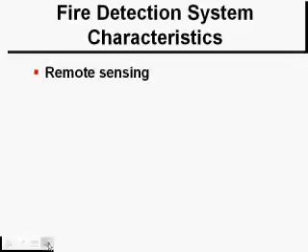But in a transport category jet, big turboprop, and a lot of other, say small turbojets, small business jets, small turboprops, you may be too busy doing other things, or things that could catch on fire could be too far away for you to notice rather easily. So you need a system that'll tell you what's going on far away from where you're at.

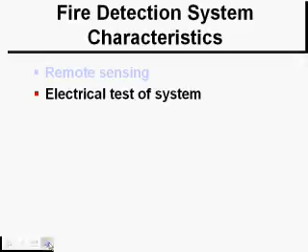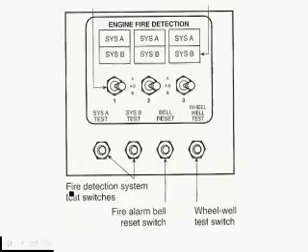These systems almost always have some type of a test. You push a button during pre-flight or during taxi to make sure that the system is operating before you take off. And here's a test panel. I think it's off an A320, and you can actually push these buttons to see if the test will work. And you're going to get lights and or buzzers to let you know that.

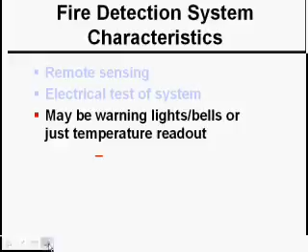And it might not be a very intricate or sophisticated system. It just might be a temperature gauge, like on a NiCad battery would tell you that the battery's overtemping. Might be warning lights. It might have bells as well. These are general characteristics of fire detection systems. We're just going to be talking about airframe fire protection systems in this class. We're not going to be talking about engine fire detection systems much, if at all.

And where can you find these detectors? You can find them on the outside of bleed air ducts. Obviously, inside of the bleed air ducts are going to be hot because the air is coming off of a jet engine. But if it leaks out, that's when it's going to be an issue. So on aircraft with a pneumatic system, on turbine engines, you're likely to have some type of fire or overheat warning system for the pilots to tell them that there's a duct leak and things outside the duct might be getting hurt.

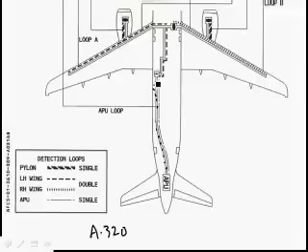So if there was a leak anywhere in this duct right here, it would make this loop come on, and in the cockpit all you would know is that somewhere between the APU and this valve right here there's a duct leak. So you're probably going to shut down this valve so that no more bleed air could come in here, because usually the APU is off in flight, so the bleed air would be coming from the engines. You'd shut this duct off so you wouldn't have any overtemps next to the duct right there.

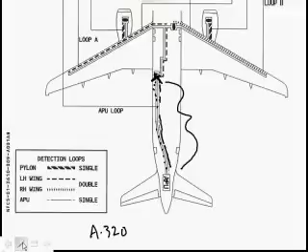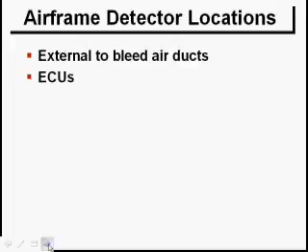Environmental control units are air conditioning packs. The air cycle machine can get hot, especially if there's a leak inside of it. So there's typically an overtemp warning system on environmental control units, on air conditioning packs, air cycle machines. Landing gear wheel wells. It's not uncommon to have overheat detectors. In fact, the A320 has an overheat detector on the brakes themselves. Oh wait, there we are, brakes.

In the cabin, although usually in the cabin it's not temperature, it's usually smoke. Lavatory is a good place to have smoke detectors. I think the FAA requires it under FAR 121, and of course it's a felony to disconnect it. Shame on you for disconnecting the smoke detector inside of the lavatory.

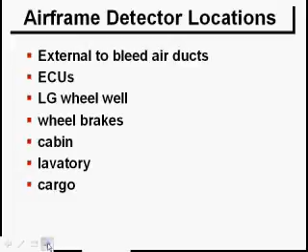Cargo compartments are a place where nobody's there, so nobody could let you know, so that'd be a good idea to have maybe some smoke detectors in there. And the avionics bay definitely might get hot if something is shorting or not working very well. So here are the airframe locations for looking for overheat or overtemperature or flame.

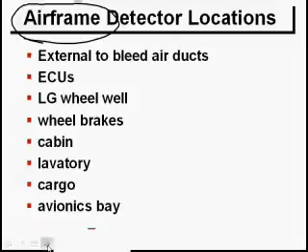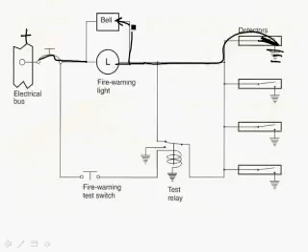Basic types of heat detectors. See if I can get it. You don't have to write this down, but here's a system with separate heat detectors. Either one of these, if it gets hot, it's going to close this circuit and go to ground, and the other side of the light goes to the bus bar, which is positive, although this might be alternating current, and of course to the bell. So the light and the bell could be grounded, and the other side positive, so they would go off. And of course this is the fire warning test switch that you would use before takeoff.

And here's a kind where the stuff inside of this loop, this is actually a really, really long tube, say about 3/32 of an inch in diameter.

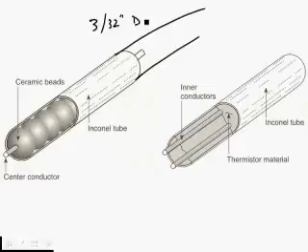And the outside metal is a conductor, and the inside is a conductor. And the material on the inside, if it gets hot, it allows current flow from one conductor to the other, and that would turn on something in the cockpit.

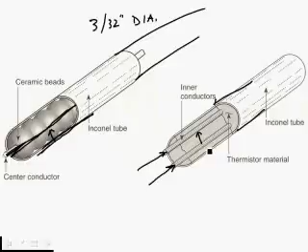Here, it's another tube, same size, probably a little under 1/8 of an inch in diameter, and it just has two conductors in it, and the goop inside, if it gets too hot, it'll allow current flow from one to the other. So this essentially acts like a switch. And there's just a circuit there.

And here's what it would look like inside of an engine compartment or inside maybe a cargo bay. It's just strapped down every 6 or 10 inches, and you can see it's not very big in diameter.

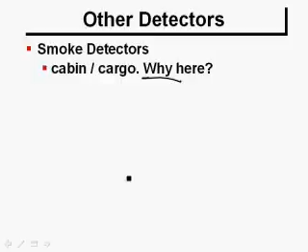Smoke detectors. Instead of just measuring heat, you could measure smoke. In cabins and in some cargo compartments, why smoke detectors there is because you'll probably get smoke before you get flame. You probably get smoke before you get a big buildup of heat. So a smoke detector would be a better first indicator in these areas.

Flame detectors, typically you find those in engine compartments. Flame detectors actually measure for infrared light. And more infrared light inside of a closed compartment would mean you'd have a flame, because the closed compartments aren't open to the sun.

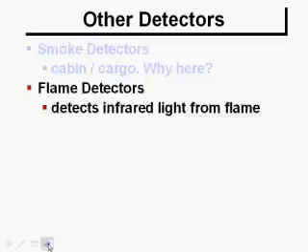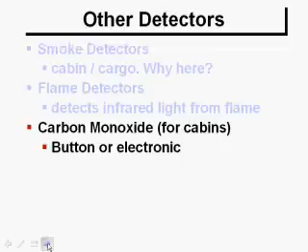Of course, carbon monoxide detectors, you're used to that if you're flying little airplanes and somebody's got an electronic or a dashboard sticky that's got a carbon monoxide detector. One could argue that that's not really a flame detector, but I certainly like having carbon monoxide detectors. And of course, like I said before, it might just be a temperature gauge, and that you'll have to monitor because the light or horn won't come on.

Typically, and this doesn't have to be engine. Let's get rid of that.

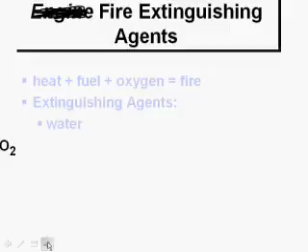Fire extinguishing agents. You've got to have heat and fuel and oxygen in order to produce a fire. And you can put it out with water, carbon dioxide, dry chemical powder, or halogenated hydrocarbons, which are typically called halons. But you typically don't find too many water fire extinguishers in airplanes anymore. And CO2 is pretty old school, although there are a few airplanes out there. Mostly it's dry chemical or halon.

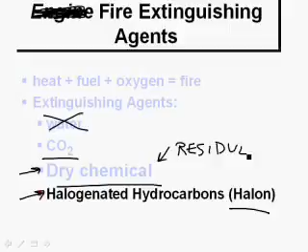One of the nice things about halons: dry chemical leaves a lot of residue, and so it's really hard to clean up. Halons, on the other hand, the newer ones don't have much, if any, residue at all. And in fact, the higher numbers, like you might have halon 1100 or 1201 or 1302 or something like that, the higher the number, the lower the toxicity to humans, so it's not poisonous. It extinguishes better than the old school ones, and less residue. So the higher the number, the better in all ways.

And there were some examples down there, but you can't see them, but what the heck. They're usually 1100s, 1200s, 1300s.

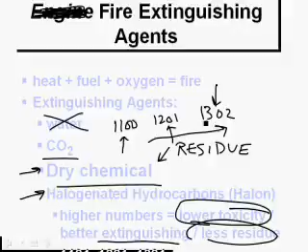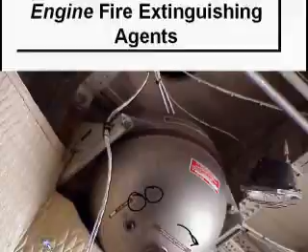And here's the system that's set up. Here's a couple of halon bottles, and this one's designed to either pump to the APU compartment or pump into the engine. Here's a picture of an HRD, high rate discharge type system, typically now with halon. And here's an electrical wire coming in so you can blow the squib. Yeah, I like blowing squibs. Get to that here shortly.

HRD stands for high rate of discharge. And typically it's halon or carbon dioxide, but it's mostly halon these days. There's very, very few CO2 extinguishing systems out there anymore. It usually only takes a second or two to drain the entire bottle.

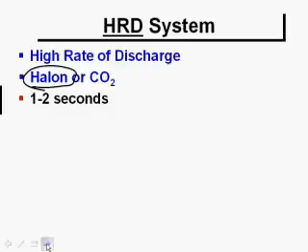Once you push the button, it'll be empty in 1 or 2 seconds, but that's good because it'll flood the compartment with the fire extinguishing agent, in this case a halogenated hydrocarbon, a halon, and that'll prevent the fire from burning. It keeps the oxygen from combining with the fuel.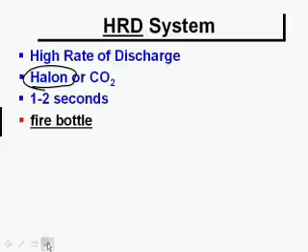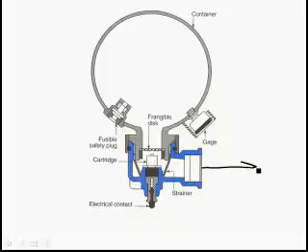This extinguisher container is typically called a fire bottle. It ought to be called an anti-fire bottle, but it's not. Here's one, typically with a pressure gauge on it. And there's going to be a squib, and here I've got a nice picture. So here's our fire bottle, and this is going to go to wherever the fire is, to the compartment.

And so we've got our halon in here, and it's compressed, very high pressure, and you can see that there's a gauge for pressure. Probably can't read the word gauge there though. And there's a screen right here, and the screen right here goes all the way around.

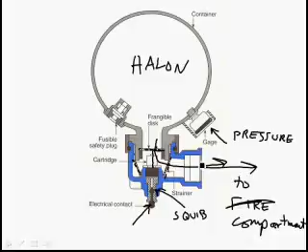And when you allow electricity to go to the squib, this is the squib right here, then it's going to blow kind of like a small gunpowder charge, and it's going to push a blade into this disc right here, and the disc is going to break into a bunch of little pieces, and the extinguishing agent is going to go out, and this screen that goes all the way around is going to hold these little pieces of the disc so they don't get into the compartment.

And this is going to essentially open this hole up, boom, and whoosh, it makes that noise. I love that noise. Whoosh.

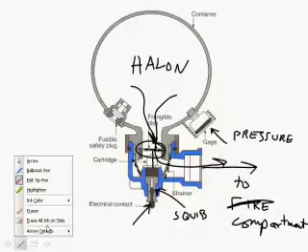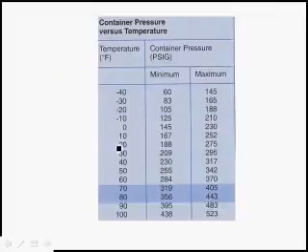Like a lot of other gases, it changes its pressure in a fixed volume when exposed to temperature. So when you're checking the pressure, you're going to have to check it with the temperature. So let's just say, for instance, it's 30 degrees, and this one's calibrated in Fahrenheit. So 30 degrees Fahrenheit says that the pressure ought to be somewhere between 209 and 295 psi. Now that's not outside air temperature. That is the temperature of the container, the temperature of the stuff inside of it.

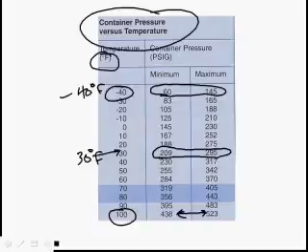So of course the higher, here's 100 Fahrenheit, it ought to be between 438 and 523. And of course if you're in Minot, North Dakota, and it's minus 40 degrees Fahrenheit, it ought to be between 60 and 145. It's the same amount of gas, the same amount of molecules, it's just the hotter it is, the higher the pressure. So when you check the pressure, you may have to pull out this temperature conversion chart and see if there's actually enough halon in the fire bottle.

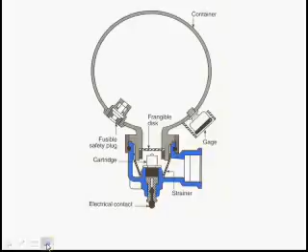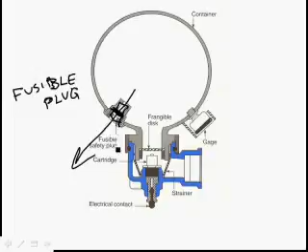Now, typically on the side of the airplane, or let me back up. Fusible plug. It works on the theory of operation identical to that of a fusible plug in a large aircraft wheel, in that it'll melt due to high temperatures to prevent overpressurization. And here shows one right here. There's a piece of metal in here, and it melts at a low temperature. If it melts, whoosh, there's the whoosh again, it lets all the halon out before this thing here blows. So it's a safety precaution.

Now, if it does that, then typically what you're going to have happen is this red disc, it blows if the temperature got too high and you prevented overpressurization. This disc will actually be blown out. You might see remnants of it.

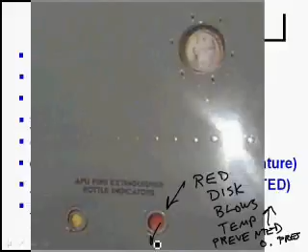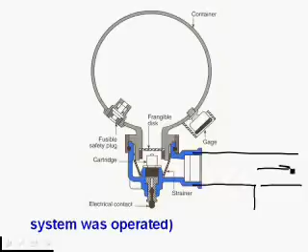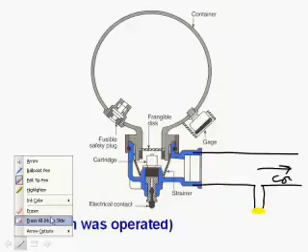The yellow disc, on the other hand, this is hooked into the fire extinguishing, right here. Here's the fire extinguishing, and this is to the compartment. And here, I'm going to get wild and crazy, man, and get a yellow disc. And here's going to be this yellow disc. And there's just going to be a little tiny hole. Got to change colors here. There's just going to be a little tiny hole right here.

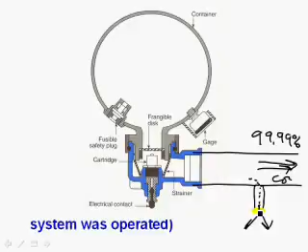So that the vast majority, 99.99% of the extinguishing agent will go to the fire, but a little tiny bit will blow out this yellow disc. So if the yellow disc is blown, it means either on purpose or accidentally, somebody fired this squib, the frangible disc broke, and the halon was sent to the compartment where it was supposed to go. So yellow blowing out means the system was operated. Doesn't mean there was a fire, just means somebody operated it.

And if the red disc is blown out, it means that the fusible plug melted and allowed the gases to escape before it got overpressurized. And of course, this is the APU fire extinguishing system on a 737. So here we got our PSI we can check. And of course, we have a backup to let us know whether or not the system was operated or the system was depleted due to overtemperature.